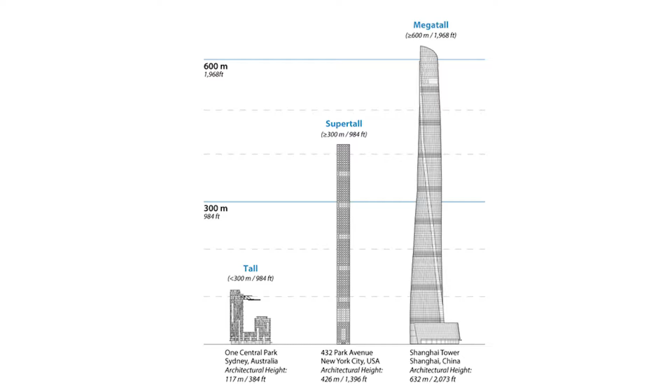So in 2018, there were 18 supertall buildings recorded, more than any single year had previously. Right now, worldwide, there are 150, and there are 196 in planning stages.

Could you repeat those numbers? There are 150 supertalls worldwide. 3 of them are megatalls, and currently in planning stages or construction stages are 196, and that includes 11 megatalls. So 196 supertall, and of those 196, 11 of those are megatalls.

So when all is said and done, as everybody has voiced and planned so far, there will be 14 megatalls worldwide. And we will likely never see a megatall in New York City, and there's reasons for that, but we will likely see many more supertalls, and we'll talk about that.

So where did this all start? And it's always fun to start with religion. If you go to the book of Genesis, there's the whole story about the Tower of Babel and building high: 'Come, let us build a city and a tower with its top in the heavens, and let us make a name for ourselves, lest we be scattered upon the face of the whole earth.'

This is a little bit about the creation of the world. In this case, building tall was problematic for them. Other people, playing devil's advocate, like Edward Glaeser, a Harvard professor, believes that skyscrapers can save the city. Now, this is all taken with a big asterisk - this article is from 2011.

We started seeing the first vestiges of supertalls in New York in the current wave in 2005 with the planning stages for One57 by Gary Barnett's Extell Development. But supertalls have existed in New York City since the 30s. We have the Chrysler Building, which reaches that criteria, and the Empire State Building. We obviously also have the original Twin Towers.

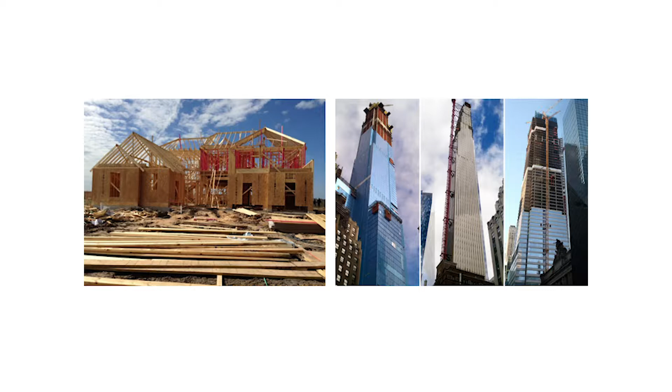So on the left, we have one of those $84 per square foot houses, and on the right, you have something that's 4.7 times the cost. You have to keep in mind, when you build in New York, there are additional costs: clearing the site, because you're likely taking down an existing building, then preparing and remediating the site, doing all this on active streets used by other people. There are legal fees, and more often than not you're hiring a fancy architect, plus soft costs. Not to complain against the stick-built house, but people choosing those are more often picking from a factory or catalog of pre-made designs, not paying an individual architect—it might be an in-house architect for a builder. So the cost is quite expensive, but you recoup more of your costs the higher you build into the heavens.

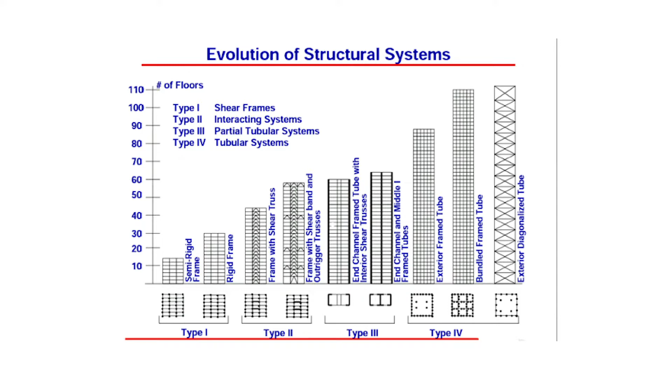There's a number of things that can stabilize them, but there's also a problem. Historically, we were limited by masonry—you needed a really heavy base and core, and it would get thinner as you went up. Steel allowed us to break that cycle, but the tubes have allowed us to move it even further. There's a tertiary system that's even been developed, called the buttressed core, where the core works in different parts, like spokes working together, solidifying and stabilizing the center.

You might also see buildings as you cross over that any sharp corner edges might have a reveal or a cutaway at the floor between windows. This is done by design to let air pass through so it's not hitting so hard. If you look in Hong Kong, there's a lot of buildings with what we call dragon holes—they have an inner court maybe halfway up the body, and the whole building looks like an O. This is also to let air pass through so it's not all hitting the surface hard. So structural technology is allowing this typology to evolve.

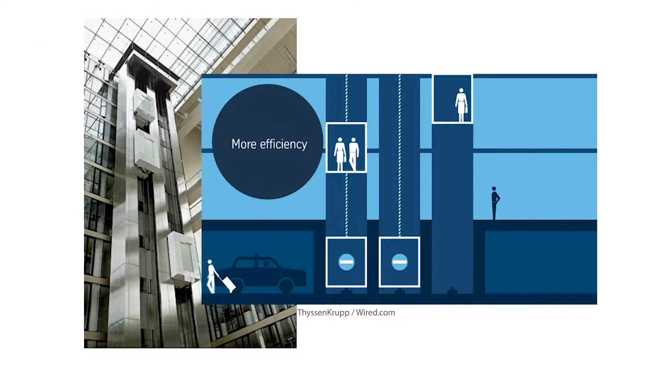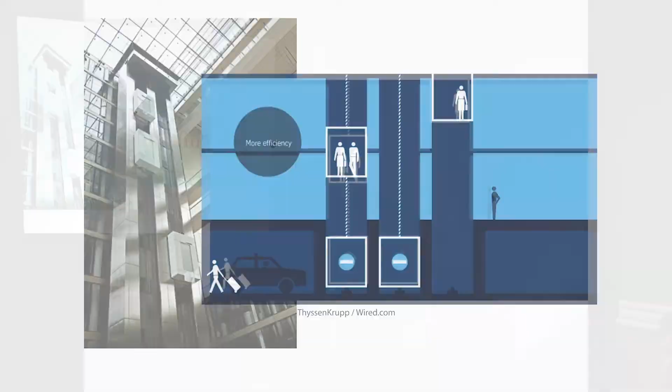We also have other innovations. Just like Otis stunned everyone in Bryant Park when he exhibited his safety elevator, having someone with an axe chop at the cord to release the elevator, where the safety caught in place with him on it—we're now looking at double stacked or twinned elevators. This new arrangement allows buildings to move 40% more passengers than a conventional elevator.

It does this by organizing the buttons. Sometimes when there's not enough people, one car will be at rest either at the top or bottom of its run, but you essentially have two elevators running in one shaft. The benefit is on a smaller site you can get twice, or 40% more, people going up and down because you have two running in the same shaft. It also creates a question of what happens if anybody gets stuck, but we're not worrying about safety—we're just worrying about efficiency.

Efficiency is my real estate and what I pay for. If I keep having cores hollowing out my building, I'm not going to have enough to sell. So here we've got technology moving to improve the saleability, essentially, of a building.

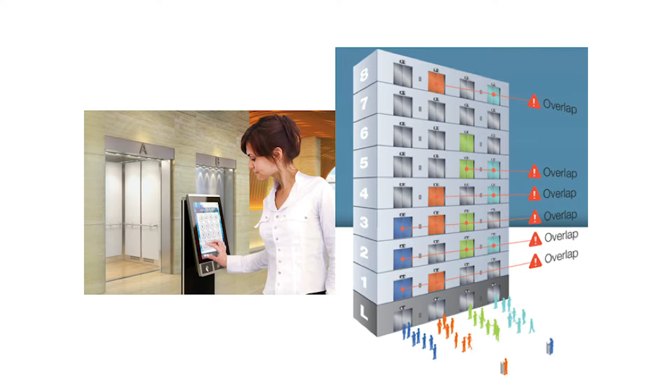You may have also seen this before, where when you get into a building today, you press what floor you're going to, and then it tells you where to go. This is called destination dispatch. Instead of everybody stopping at multiple floors, it groups them to create more efficiency within the run.

So technology is moving forward. What happens when we lose power and technology goes out? I'm hoping I'm not around for that.

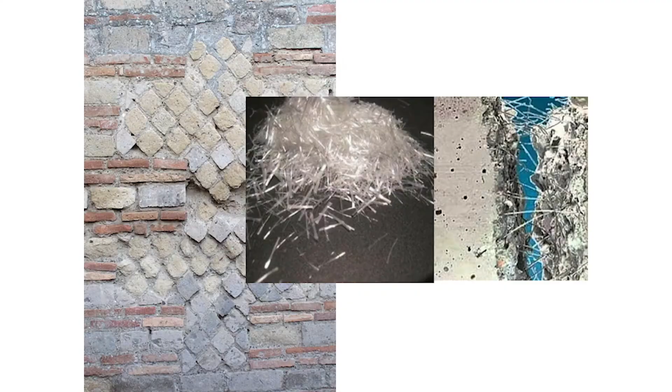On top of this, we have concrete. On the left, the Romans gave us concrete, started with a bunch of different things, mainly garbage and rubble infill. They had great sand from volcanic ash called tufa, mixed with face brick. Sometimes they'd even put fancier stones, sometimes travertine on the outside. Rome didn't have the great marble that the Hellenic kingdom did. Sometimes they just made patterns and left it.

Right now we're using new types of fiber, new chemicals, admixtures, and microfibers, allowing the structure to be thinner. So what's the benefit of concrete?

We have a tall, big building. Why do I want to do this so heavy? Well, concrete not only helps deaden the sound between floors, it also helps stabilize. So when you're swaying, it's better for tall buildings. It's also a layer of fireproofing built in.

With steel, you have the added layer and cost of labor spraying all that steel and then encasing it in double layers of sheetrock for a 2-hour rating. Here, you don't have to encase the sheetrock. You'll put your finished floor on it, so there's an efficiency. You're not building as heavy either.

This new carbon fiber technology we're seeing is used right now in jet aircraft and racing bikes. This is really the future of construction. We're moving all these new materials forward. So that's great—industry's keeping up, right?

Part of my concern is not all of these are tested. And now we're testing them at hundreds of feet in the sky, above active sidewalks and streets.

Another concept is the idea of vortex shedding, and a lot of this has been a guess in the past. What happens when the wind hits the building? How does the wind work around the mass, and what does that wind flow do to disturb the buildings around it?

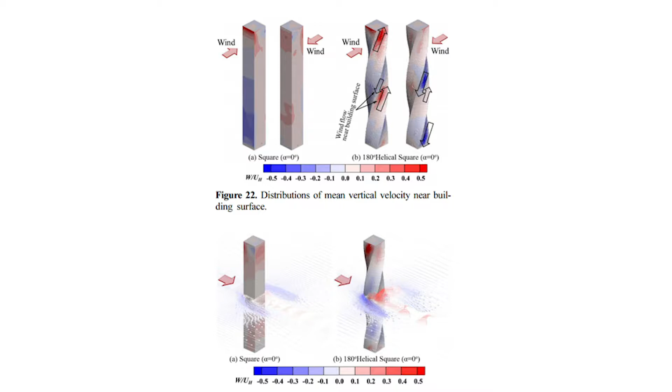Or other features—if you have a smaller terracotta building next to this and this building's getting pummeled, suddenly all that air is being directed at them, and you're harming your historic building. Now they're looking at ways of changing the design of the building and the structuring to allow the wind to flow around it. So this is why we're maybe seeing more shapely buildings, maybe things like the Gherkin.

This allows us to work on a computer level to test out and make buildings safer. The other question is the chicken and the egg—we're inviting a nuisance that we're trying to solve. Really, the 3D modeling is a new way to justify what we're doing.

Unfortunately, the rules have not kept up. So right now, while a developer might be doing that for their own interest, it's not part of the code. And when people are looking at it, they're often looking at this vortex shedding in a vacuum—literally, they're looking at their own building.

When you have something like Billionaire's Row coming, or a clustering of supertalls, there's a cumulative impact, and nobody's really studying that. The one thing that comes out of this is the promise of jobs. With all the good and all the financial stats, we have jobs. But the question is, these are temporary jobs—how long do they last? And what's the benefit of these jobs when the construction workers leave and you have a building that is less than half occupied in perpetuity, or at least that's what the market's doing right now.

So it all comes down to the concept of economics driving this, right? We're creating jobs, we're creating design jobs, we're using new materials, we're advancing technology. There's jobs in demolition, there's jobs in carting, there's jobs in people who serve lunch to construction workers.

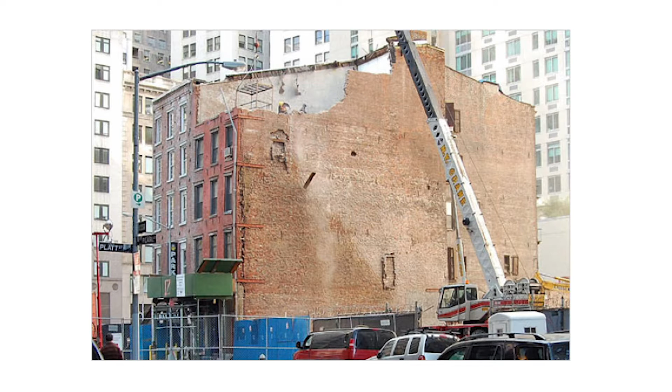Well, we must tear something down first to build something new. In this case, this was a 5-story building that was 176 years old. It was a warehouse between John and Platt Streets that survived the Great Fire of 1835 and every other calamity that befell Lower Manhattan until 2007.

If you look just next to it, 211 only stayed, and it's a facadeism. They're using it to cover an entrance to a parking garage for 2 Gold Street on the other side of the block. And that's because this was an early warehouse for Colgate-Palmolive. It was associated with a famous brand, so it stayed. So it was not a landmark.

They tore it down. I was reading about this, going down a rabbit hole today. There was all sorts of fancy brickwork in it. And this is what it looks like today from Google Street View. It would have been the middle section right there above where it says Google.

And the quote from David Dunlap at the time was, "Given the new jobs and businesses that will be created in its wake, the loss of 213 Pearl Street will almost certainly help make New York an even wealthier city, but it will leave New York a poorer city too."

And this is the question of density and height, and clearly a district that up until the early aughts was still 3 and 4 stories. So what else is at stake?

Nonprofits are being targeted. Provisions meant to help them are being used to prey on them. The idea of the community facility bonus in particular has stripped some buildings in a very short radius in the Upper West Side. On the right is the American Bible Society that had been in New York for 199 years that sold out. On the upper left is the Lincoln Square Synagogue, which I call the cookie jar, and that is now the site of 200 Amsterdam, the 668-foot tower.

They did a land swap. And on the bottom left is Congregation Habonim, which also did a land swap and is allowing for the development of the tower I'm talking to you about.

Where's that? That is 36 to 50 West 66th Street. That used to be 50 West 66th, I believe, or 44 was the specific address. That's the lot. It's the Central Park West to Columbus block.

And it's also creating a lot of waste, right? This is the Union Carbide site originally. It was made LEED Platinum in 2012, and it will be the largest controlled demolition in the history of humanity.

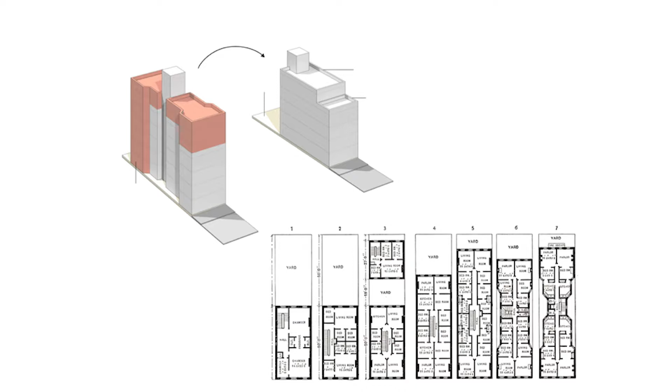We've had a series, a history of improving living standards, right? We went from dumbbell tenement typologies in the lower right, evolving over time, and now how we would reuse that same floor area ratio on a new site. Some of them are now too tall, they're overbuilt, or have too many apartments, or too many businesses.

Even despite all this reality, there's very little of the city that's in play in any given year, even though it seems like everything's under construction. So time out for a second, right? Where are we going with this? What about the flora and fauna of Central Park? Who's concerned about that?

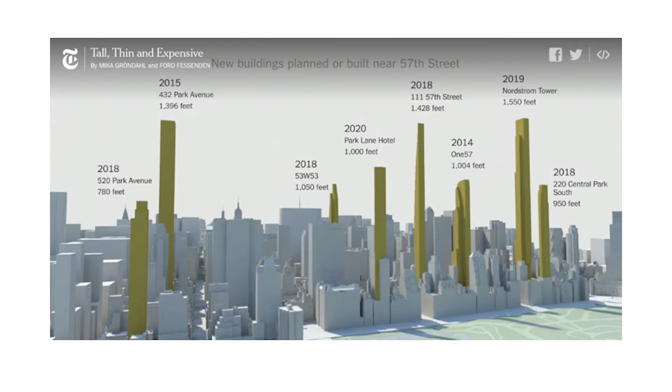And what's the responsibility of someone who owns one of these apartments? Once built, these are not going away. As it currently stands from a month ago, more than half of these remain unsold. And they're not even finished, right?

Nordstrom's going to be opening later this month. The rest of the building's not finished, but in pre-sales, they're not even sold. The fact is we don't need them, and most people don't want them. So why are we still building them?

The reality is money was on the cheap for a very long time, and that's evolving. And maybe pending soon to happen changes in the market, other things that are not too far underway might stop or get pulled. We will see.

If you want to look at true density, though, look at the Upper West Side. We're the second densest neighborhood in America, with 166.8 people per acre. The Upper East Side has us beat by almost 4 people per acre. The Upper West Side is 166.8 people per acre, and the Upper East is 170.3. So that's the number 1 and number 2 densest neighborhoods in America. So we don't need a super tall to create density.

But we have super talls to create other concerns, right? Safety, right? With the Nordstrom Tower we were just mentioning, that is one of the largest cantilevers ever built by man, over the Art Students League, no less. A piece of glass fell, it crushed a security guard and broke someone else's arm.

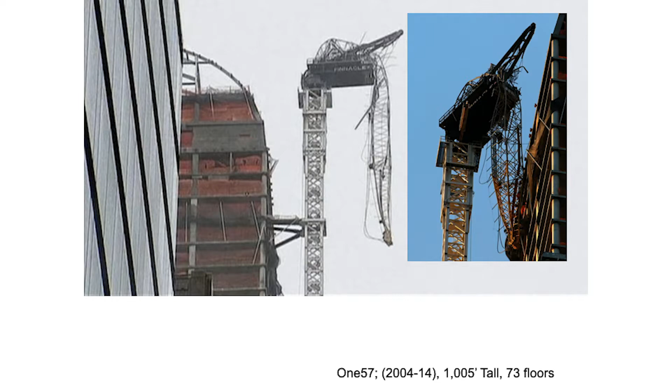We're all familiar with the Sandy crane, which caused panic in Midtown. Less than a year later, the same crane stalled for hours during a large windstorm, while it was hoisting concrete for an elevator. In both cases, both sides of the city block had to be shut and evacuated. Imagine getting emergency response to evacuate all these tall buildings during a storm where they're already stretched. So this is just pushing the stereotype that super talls are notoriously built quickly and sloppily.

The Nordstrom, how tall is that going to be? It's like 19 something, right? Yeah, something like that. I will show you where we can find it. It's on our website. Taller than the 157? Correct. 157 was Extell's first, 1,005 feet. This is 1,005. Maybe the other one's like 1,496. So it'll be taller than... Oh yeah, it's definitely taller. It'll be 50 feet taller than... it's in the 1490s, I think, because the Stern building is just about 1,000. It will literally be taller than the Freedom Tower, minus the spire.

And this is one of my favorites. This is from 66th Street, the construction site, where they're just moving so fast. Someone apparently broke their arm in this instance too. I'm not happy they broke their arm, I'm just pointing out it's such a ridiculous photo, making our point.

And this speaks for itself, right? And this is partly like we have codes for a reason, right? Building codes are not punishment, they're here to protect users and the public. On March 25th, 1911, 146 workers died when a fire broke out at the Triangle Shirtwaist Factory. And for 90 years, it was the deadliest workplace disaster in the country.

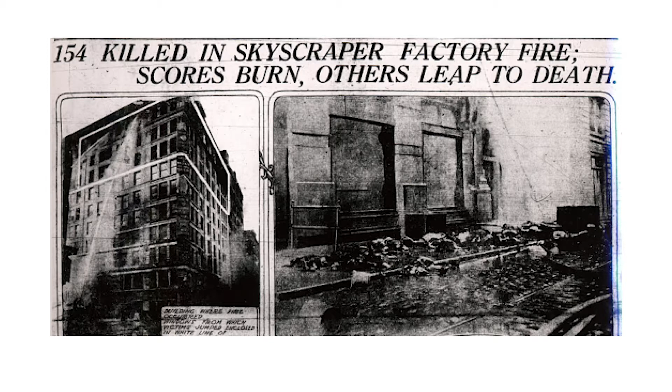But suddenly we want to do workarounds. We don't want to have to deal with following these rules. Right now, there's a proposal to make elevators your option of egress in a case of an emergency. And this has already been tested. If you go to the Stratosphere in Las Vegas, which is the tallest building in the western half of the country, you are supposed to take the elevator to go down in case of emergency. So why are we rewriting all these rules that we know, just to suit a few developers?

View, light, air, experience, those are also resources, right? And the infrastructure is here, but the density is crowding and restricting our passage, making the response times longer and more impossible as we get into this vortex of endless stairs. So first responders are endlessly responding, and how do they get away with this? Well, the case in point that we're complaining about, on the left, that block was a 161-foot void.

161 feet, that's taller than the Great Hall at Grand Central, which is 125 feet. So we complained, we brought it to the city, which had already approved this, and the solution was to break that into 3 spaces, and they effectively made it even taller. They did a 64-foot, 64-foot, 48-foot void.

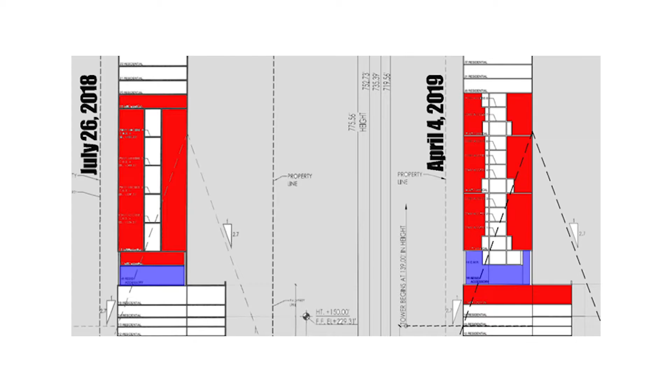To put that in perspective, 64 feet is a typical cornice line of a brownstone. So this is essentially 2 brownstones stacked, and then 48 feet above that just for mechanical. The whole point is that once they got their floor area below a threshold, they wanted to raise the views for the upper floors. And this is solely a stilt. The rules are written in their favor currently.

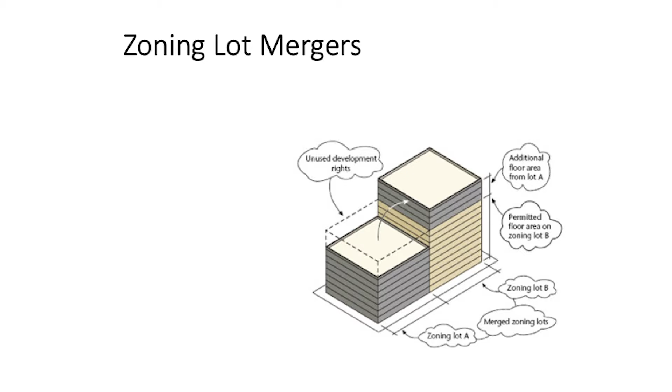So the concept of floor area came with 1961 zoning. This is the latest edition of it. And this introduced a few ideas. TDRs, where you can transfer air rights from another, maybe an individual landmark, for example, across a street or to an adjacent property, so the unused airspace could be realized elsewhere. Zoning lot mergers, where if I join with my neighbor, suddenly we can share the same lot and move like a fluidity of volume of floor area.

Just dealing with the concept of floor area alone: if you have FAR 1 floor area, you can cover your site 1 time. If you have FAR 1, you can cover half of your site twice, or you can cover a quarter of your site 4 times. What they don't talk about is how thick that coverage is.

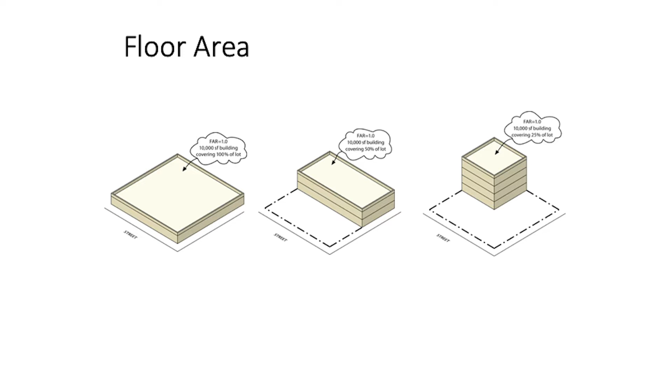I talk about grandma pancakes. Maybe your grandma made pancakes that were a little raw in the middle because they weren't cooked through, since they were so fat and thick. Well, you might have 8 grandma pancakes on the left, which would be 8 FAR, and that'll be taller than 20 FAR of crepes. And regulations don't decide how tall that is. There's no 3-dimensional value to FAR, it's only 2-dimensional.

On top of this, as the zoning code has been infiltrated by different lobbyist groups and the real estate board, there's a lot of stuff that you can get for free. A cellar, anything that's fully below grade, pipe shafts don't count. Unenclosed patios, something that's less than 67% enclosed, electrical chases, etc. These don't count towards your floor area.

So suddenly, a building that is covering the full lot 3 times is not 3 FAR. It's less than, and you have more, and you can keep building it higher. And we're changing the city for useless intentions. YIMBY people claim that density is the goal, but the reality is it's just 2nd, 3rd, and 4th homes for the ultra-rich. We're not creating a solution to the existing housing needs in our city. And these supertalls don't mitigate any of these issues. More often than not, they're just sweetheart deals for people to avoid taxes.

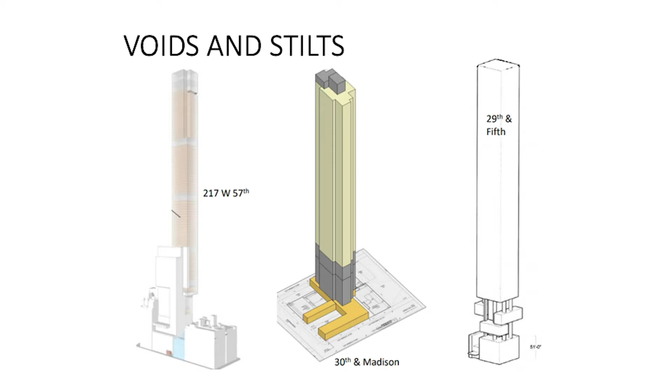When it was built, it was the largest enclosed atrium. There's one at the Post, and that's a benefit to the people in that building. But when you have a void that's completely inaccessible in a residential building, that's serving nobody from any public or private enjoyment. It's literally just a stilt to give you a better view and increase your personal value.

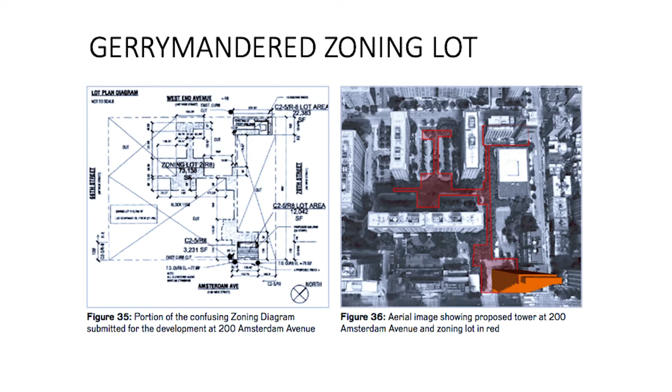This is, I know, hard to see, but a gerrymandered zoning lot. This is the 39-sided zoning lot that was used on a superblock site to create 200 Amsterdam, which is now this. And fake buildings. So this is what the developer filed for the site where we're looking at the tallest building on the island of Manhattan, north of 59th, 60th Street.

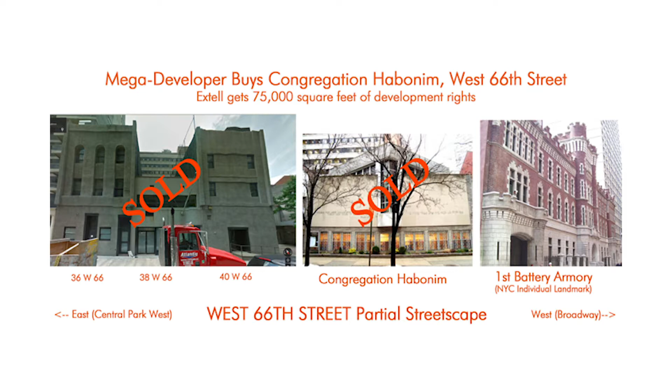They filed a 26-story building that nobody would blink an eye at. By combining sites on the left, those were 3 sites used by ABC for set storage because they used to film their soap operas here, Congregation Habonim, and air rights from an individual landmark, the First Battery Armory, which stands and is currently ESPN's headquarters.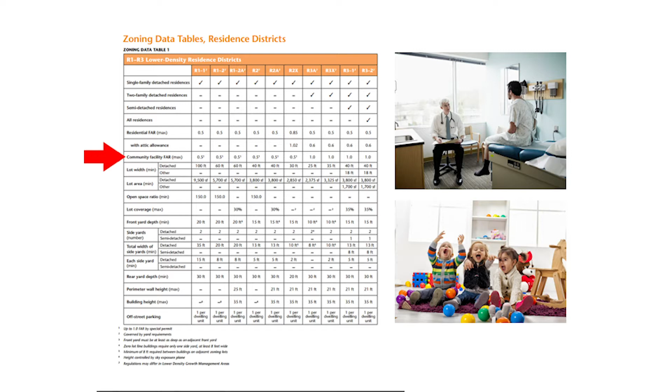Instead, this is being used as a loophole to gut nonprofits and get them to agree to move into the basements or cellars where they're not even paying for floor area, so that they could build higher. In this case, the developer acquired the land much more cheaply by doing this, and they were creating a 90-foot basement, so effectively 9 stories underground. Who is the developer? Extell.

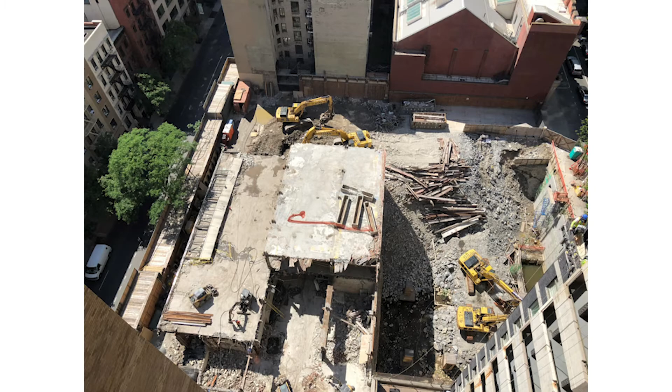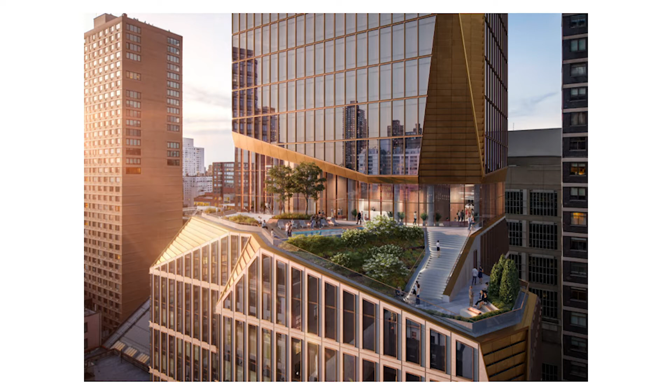That's it? Wow. So what, can I ask you, the void - why did they just not put more apartments in there? Because of the multiple dwelling law. They don't have the floor area. They can build tall, but if you put another floor in, you're paying for it in floor area. So from the developer standpoint, they want to put the floor higher so they can make more money out of it. The metrics have gone so reversed that the land acquisition cost, clearing the site cost, and building a void makes more sense because you have such greater income to recoup. It has to do with area of living space - there's only so many pancakes you can make.

So this was another great moment. John Calico, another developer, said a different developer did something smart at a site we looked at on West 67th Street - he meant 66th, that's a typo, but that's what he said. He talked about how he filed a building this big, but he's intending to build a building this big. These are the kinds of tricks you have to do these days, and if you hope to be successful, you have to trick the community.

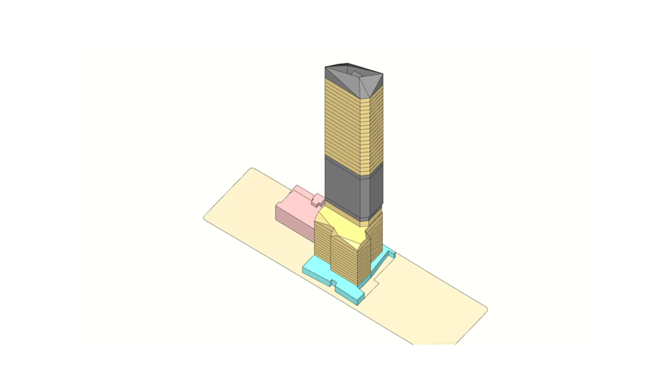So again, this is completely as of right, no community input, no community board review. This was a view of what it was initially supposed to be, some of the neighbors that were working with different organizations, and the rendering of the site with its void, grossly out of proportion with its context. Why was there not community board review or other? Because they didn't have to, it was as of right - they can self-certify.

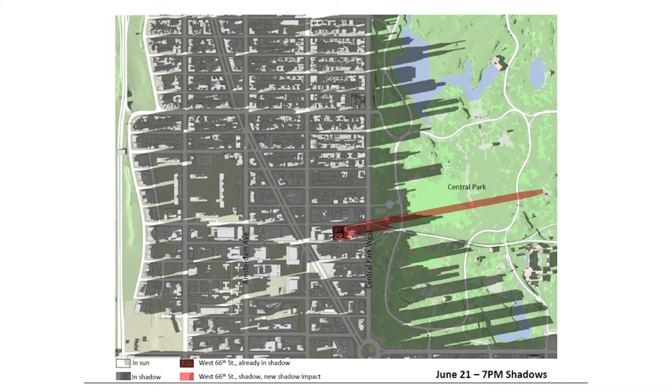So this is a view of the shadows on June 21st. It will almost reach the Children's Zoo in Central Park. There have been great moments with Pat Kiernan even doing the football play-by-play, making fun of how ridiculous this building is.

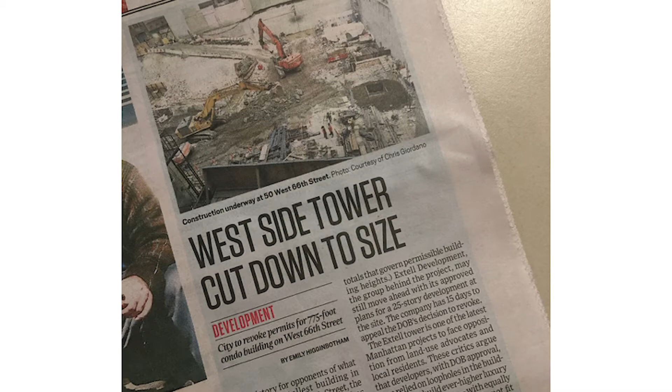And currently we're right now at the Board of Standards and Appeals. We paid a king's ransom for an expediter to get the original plans. There's over 1,000 sheets, and they're unnecessarily filled, but there's no real equipment there. There's no there. And so they were charged by the Board of Standards and Appeals to do a takeoff.

Justifying all of the mechanical equipment and the space around it, right? Well, mechanical equipment's usually designed so someone can access it and service it. They're not going to create a 5-story boiler, a 64-foot boiler. And I literally just skimmed it as I left, but the DOB is like, nope, everything's great. We haven't seen the drawings that were provided. They might have come since. So stay tuned to that.

But we've been working in the press. This is Dick Gottfried on the right, Ben Kallos. They've both been very forward in pushing the agenda to curb the supertalls. Anytime we're on news, displaying all of the dirty money that's coming from Kazakhstan in this, fighting this at both the Department of Buildings level, presenting and showing them how ridiculous they are, not even following their own rules that they state, and also challenging it at the Board of Standards and Appeals.

This is the void I showed you, and just again, a void is literally the height of a brownstone building. So this is a little bit of a dated photo. They've got it up to street level right now, but it really is the Upper West Side's Grand Canyon. And I know I'm at time, so I'm going to be wrapping up in 2 quick minutes here. All is not lost. There is hope.

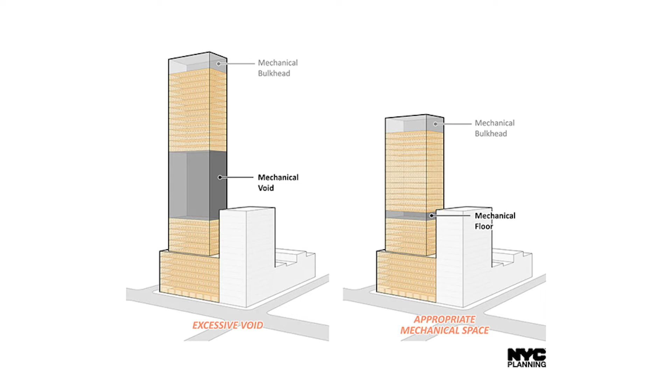City planning has taken an action on voids. So instead of having a large mechanical void, now they're allowing you to have a 25-foot void and have it repeatable after 75 foot of floor area. The problem is 75 foot of floor area can be 1 floor. And 25 feet is still ridiculous. That's 2.5 stories. Because the city won't do it, the state is doing it.

That's Senator Jackson and Assemblymember Linda Rosenthal. These bill numbers will change because they have to be reintroduced in January in a new session. And if you want to take a moment, we have a change.org petition that's on our website. If you go to the center tab under advocacy, you'll see a supertall tab. It's linked in a few different places. It sends every time we get another 500 people an announcement to everybody on the housing committee that this is coming up.

And it's a little bit of an uphill battle at the state because most of the state is not New York City. And the people who are in other parts of the state where making Chobani and Fage yogurt's the only game in town don't really care about how dense New York is developed. And what this would do is create a 3-dimensional value to floor area and create height limits. So after a large 20 or 25 foot base, I have to reread it, you can have larger space, but you're counting it in greater quantities against your floor area.

So what to do as a general citizen? Pay attention to your neighborhood nonprofit, your citywide nonprofit. Follow what's going on at the community board. There's a great meeting tonight about a building at 96th Street in the Upper West Side, but I'm here with you happily. And just talk to your local council member. They usually have an open door policy. They have office hours. Just stop in, be a nudge, as my mom would say.